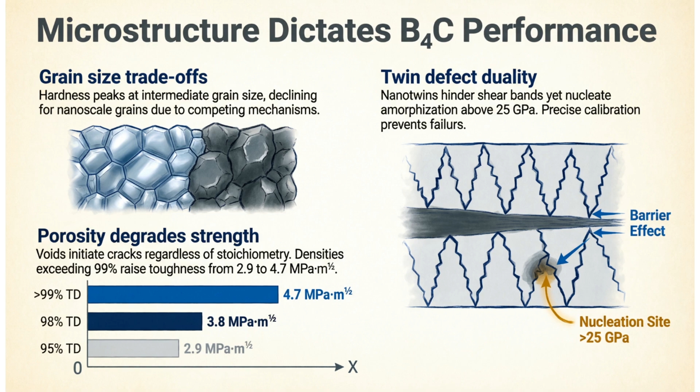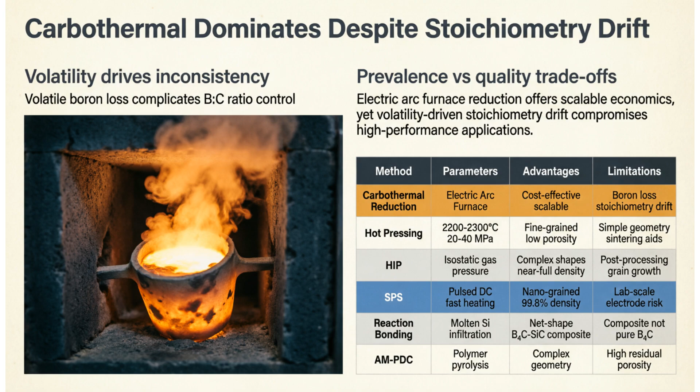While porosity degrades strength, twin defects can hinder shear band formation, though they may also nucleate amorphization if not precisely calibrated. Carbothermal reduction is common due to its scalability, but boron volatility often leads to stoichiometry drift, which can compromise the quality needed for high-performance use.

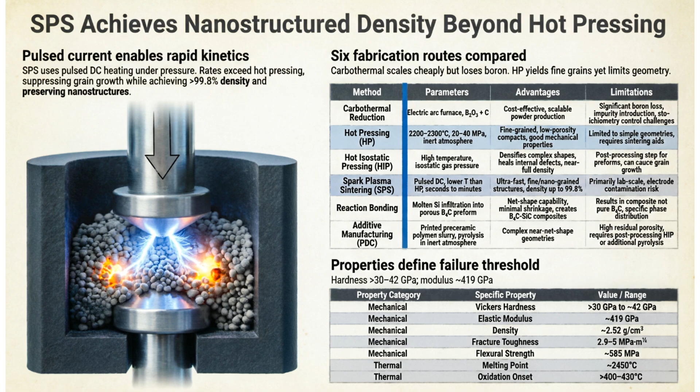Spark plasma sintering, or SPS, enables rapid kinetics and high density, helping to preserve nanostructures that might be lost during traditional hot pressing. Additive manufacturing allows for complex geometries, but currently faces limitations with as-printed porosity. Post-processing is required to reach the density thresholds needed for ballistic utility.

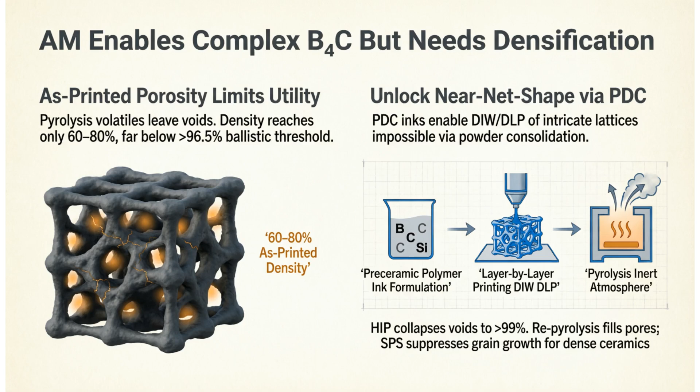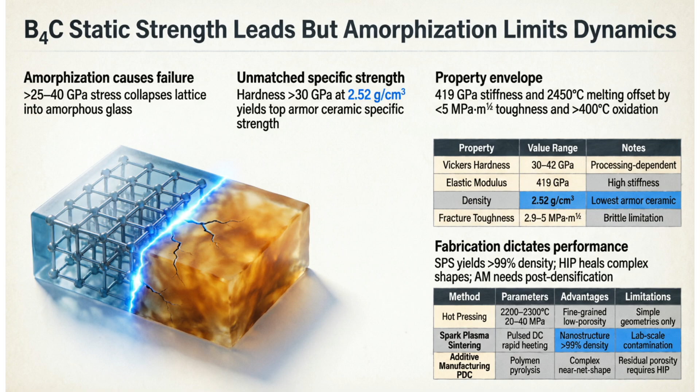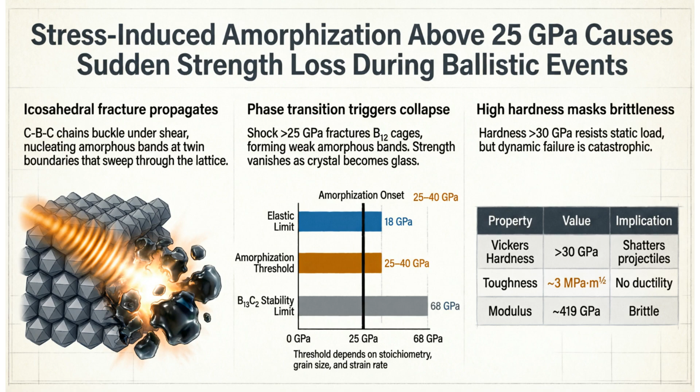Ultimately, boron carbide offers unmatched specific strength, yet its dynamic utility is capped by amorphization. Performance relies on selecting the right fabrication method for the application. During ballistic events, stresses above 25 gigapascals fracture the boron 12 cages. This leads to the formation of amorphous bands and a sudden, catastrophic loss of strength.

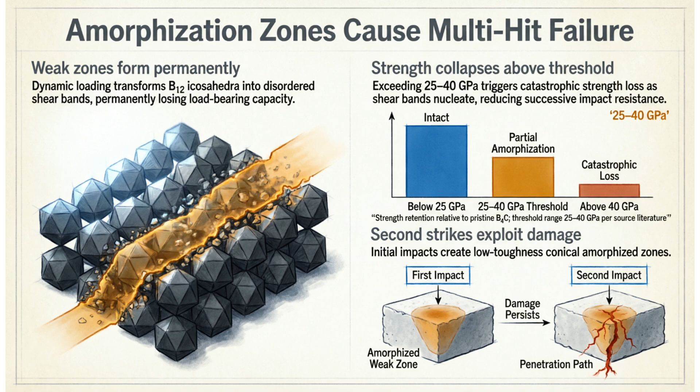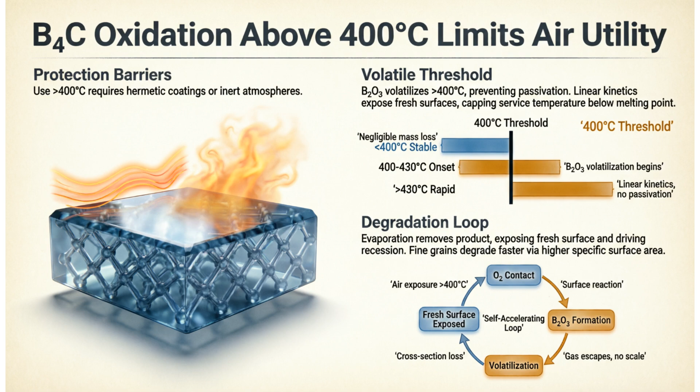These amorphized zones are permanent, creating weak points in the material. Subsequent impacts can exploit this damage, further reducing the overall resistance of the armor. Environmental utility is also constrained. At temperatures above 400 degrees Celsius, oxidation occurs as boron trioxide volatilizes, preventing effective surface passivation.

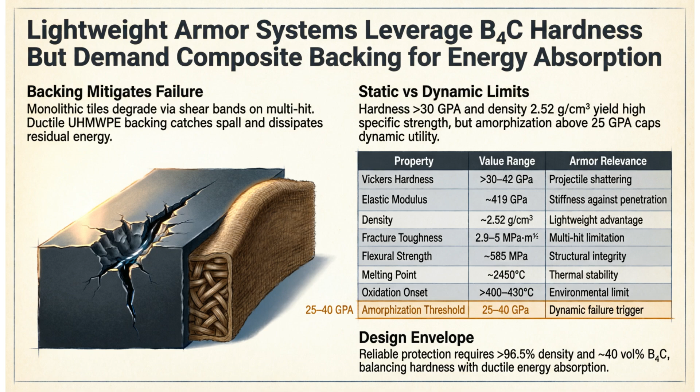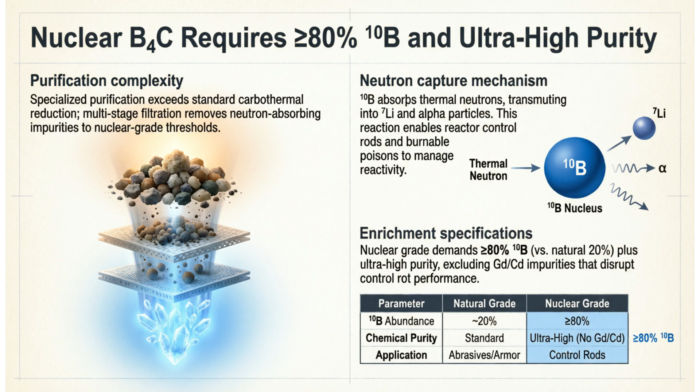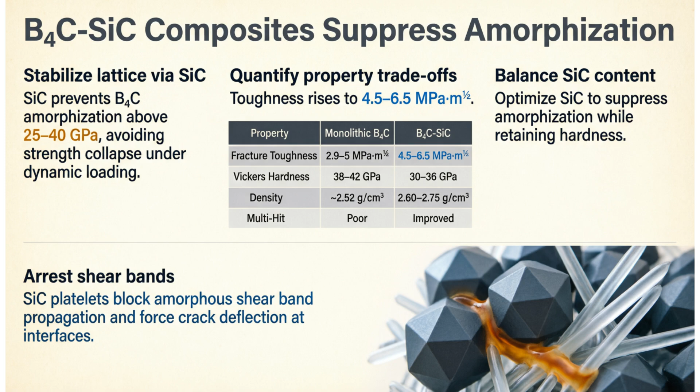To overcome these limitations, lightweight armor systems often pair boron carbide with composite backing to absorb residual energy and mitigate the effects of brittle failure. For nuclear applications, boron carbide requires specific enrichment, demanding at least 80% boron-10 and ultra-high chemical purity to function effectively in control rods. One solution to the amorphization issue is the use of boron carbide silicon carbide composites, which can suppress shear band propagation and improve multi-hit performance.

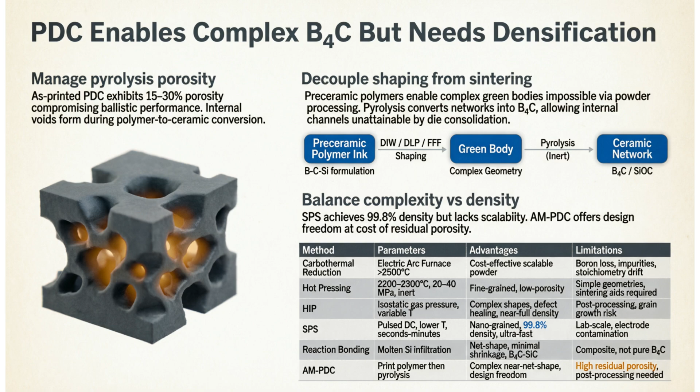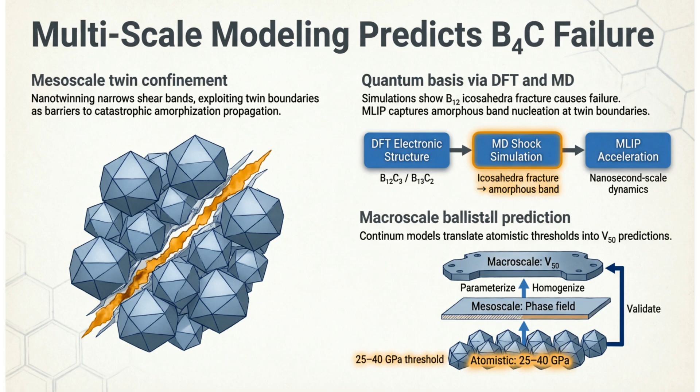In summary, while processing technologies like additive manufacturing provide new design freedoms, balancing complexity, density, and material stability remains the primary challenge for the future of boron carbide. Advanced multi-scale modeling now predicts boron carbide failure by linking quantum-level simulations of icosahedra fracture to macro-scale ballistic performance, helping us understand how twin confinement narrows shear bands.

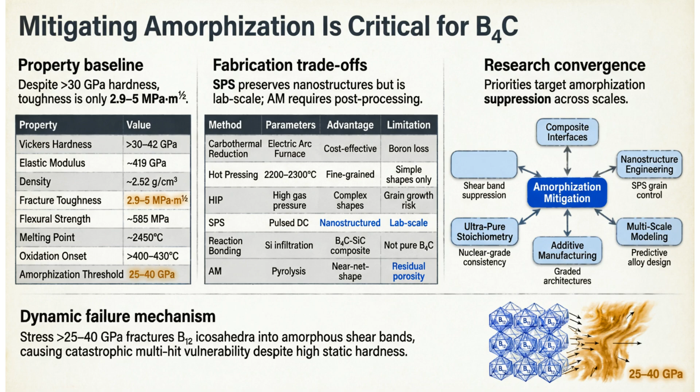By using DFT and molecular dynamics, researchers can now simulate nanosecond scale dynamics, capturing how amorphous bands nucleate at twin boundaries under high-stress conditions. Looking at fabrication trade-offs, we see that while SPS preserves critical nanostructures, it remains a lab-scale process, highlighting the need to bridge the gap between small-scale purity and large-scale manufacturing.

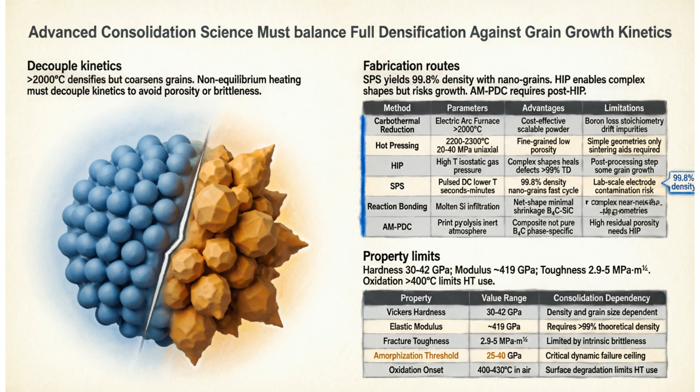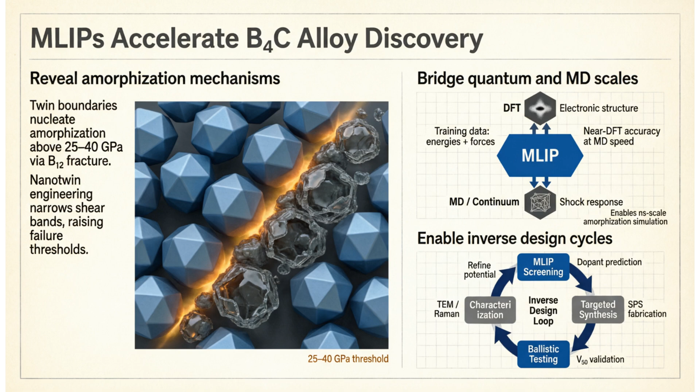Machine learning interatomic potentials, or MLIPs, are accelerating alloy discovery by bridging the gap between quantum electronic structures and MD-scale shock response, enabling new inverse design cycles. Graded architectures are a key breakthrough for resolving the paradox.

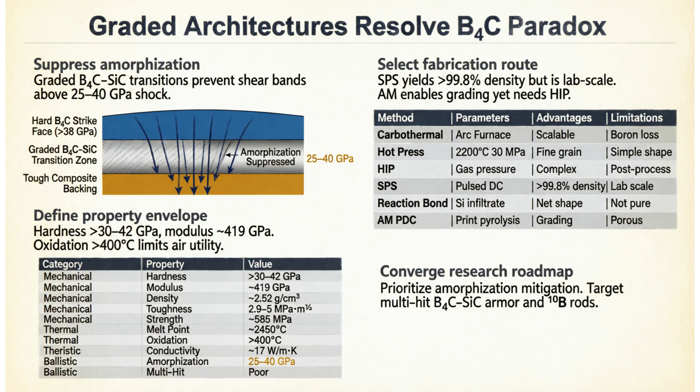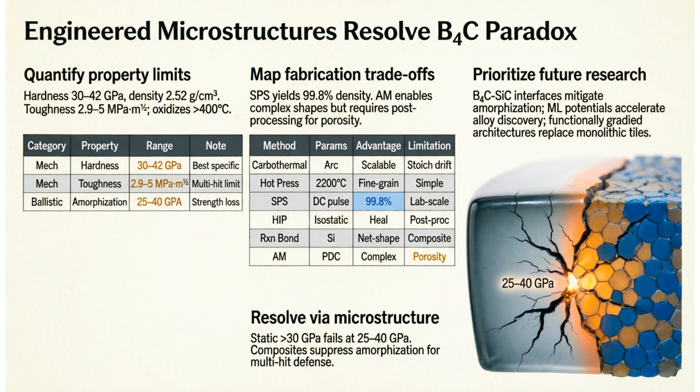By transitioning from a hard boron carbide strike face to a tough composite backing, we can effectively suppress harmful shear band propagation. The future research roadmap prioritizes amorphization mitigation. By converging on advanced synthesis techniques like additive manufacturing, we can develop next-generation armor capable of superior multi-hit performance.